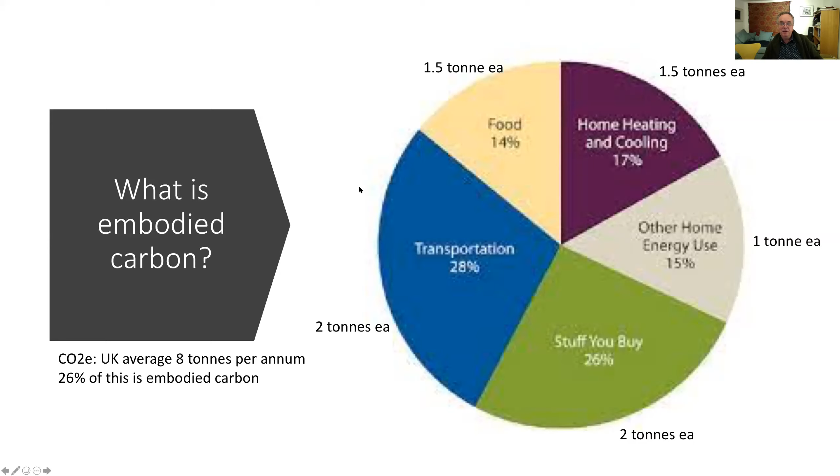It's much less than some countries such as Australia and New Zealand, where it's at sort of 15, 16 tons per person. But it's much more than most of the developing world, which is down at sort of 1 or 4 tons. So I want you to get your head around this unit of measurement, a ton of carbon dioxide. What does it look like? Well, I actually found this slide this morning, a brilliant illustration of what a ton of carbon dioxide looks like at atmospheric pressure. It's about 560 cubic meters, which more or less equates to the volume of a detached 4-bedroom house.

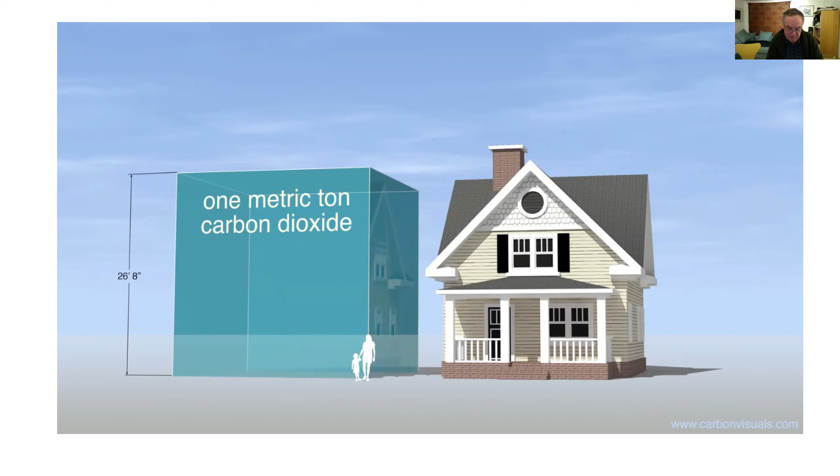What can you do with a ton of carbon dioxide? Well, you get it from burning about 5,000 kilowatt hours of gas or electricity. They're pretty similar in carbon intensity at the moment, or burning 400 litres of petrol, which would drive you 4,000 miles in a petrol car. A typical UK home burns between 2 and 5 tons of carbon dioxide per annum. The more efficient the home is, the less it burns. A family flying to Spain and back for a holiday would use about 2 tons.

A typical UK home build releases as much as 30 to 50 tons of carbon dioxide. And amazingly, even things like solar panels have quite a high embodied carbon. A 16 PV panel array would use as many as 5 tons of carbon dioxide. And it would actually take 5 to 6 years to produce that much energy once it's plugged in.

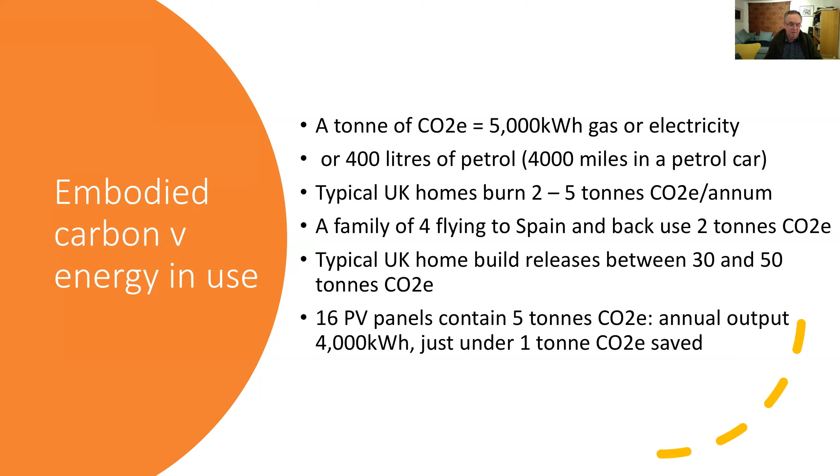Now, where do you find out more about these things? There are several databases out there now where you can dig deep into the world of embodied carbon and work out what the footprint of each product you're using is. When I started writing about building in the 90s, none of these existed. And all I had to go on was a group of photocopied sheets available from the Centre for Alternative Technology.

The ICE database, the Inventory of Carbon and Energy, because that's what ICE stands for, came out of work done by the University of Bath around 20 years ago. And it drilled down into the subject at a much more technical level than I'd seen before. It's basically just a giant spreadsheet, but it's populated with the carbon factors of any building material you could ever think of. There are many other resources which are available now, and I've listed some of them on this slide here.

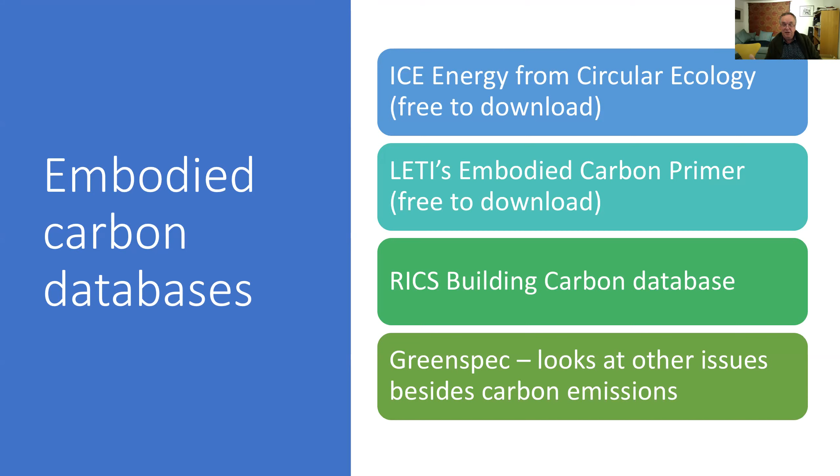They'll be available for downloading afterwards. But it's to the ICE database that I return when a query comes up. The basic rules are: first you work out the quantity of the product, the material you're using, then calculate its weight, and then look up the carbon emissions per kilogram weight and multiply the weight by the carbon factor. It's very similar to the work a quantity surveyor does, but you're getting an answer in tons of carbon dioxide rather than money to be spent.

So how do construction products stack up here? Just a cursory glance at the figures reveals there are some very basic rules of thumb here, and these are summarized on this slide. You can essentially divide construction products into a few simple categories. Generally speaking, the manufactured products use large amounts of fossil fuel energy to produce, often in kilns or in factories. And as a result, they tend to have very high levels of embodied carbon. Cement and steel are particular bogeys here, because their manufacture involves not just very high temperatures, but also splitting away the carbon dioxide from the basic materials in order to process them.

In contrast, natural materials are generally quarried and involve much less processing, and what processing there is less energy intensive. So as a result, as a rule, transportation to site is far less significant, really a second order effect. It's the amount of processing that makes the big difference here. Timber and biomass products are, of course, really interesting. They're natural products, but unlike the mineral-based ones, they absorb carbon as they grow. Exactly how embodied carbon calculators deal with this feature isn't always consistent, because it's actually quite complicated.

All trees naturally capture carbon as they grow, but once you cut a tree down, it stops that process dead in its tracks. Only if a new tree replaces the one just cut down does the carbon capturing cycle continue. In a word, the timber harvesting has to be sustainable, and that relies on a series of product certifications in place that we never quite know whether they're as sound as we'd hope them to be.

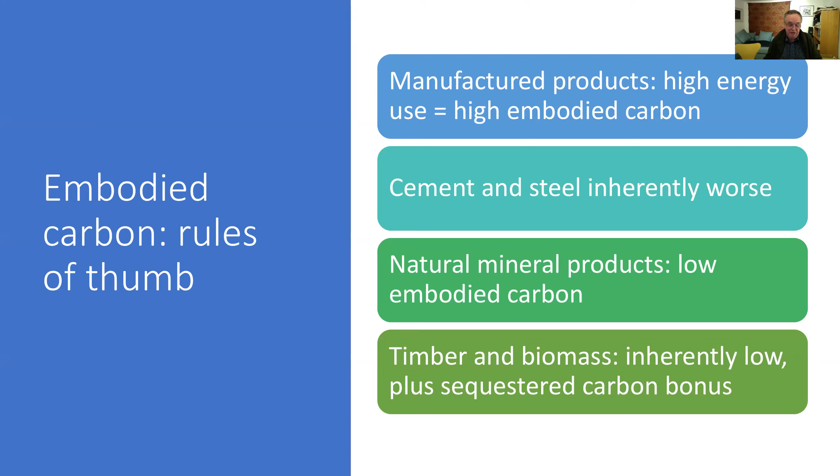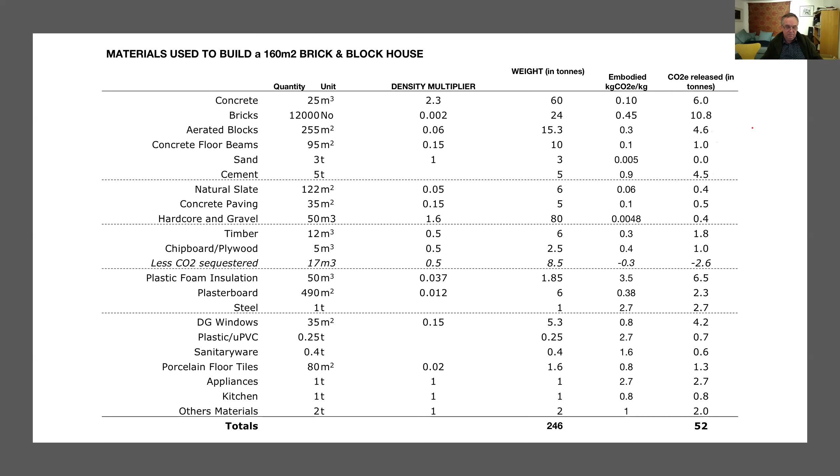But the bulk of the score is up here in the top 6 rows. Concrete, bricks, very high, 12,000 bricks, aerated blocks, and cement. In fact, that's well over half the total score. It's up here in the masonry products. That's where the bulk of the processed manufactured goods are. It just so happens that this very point about timber looking good and manufactured masonry products not looking so great has been explored extensively in the latest issue of the Passive House Plus magazine.

It looks at 6 different methods of building the same structure, in this case a 76 square metre end terrace house. It's the first time I've seen such a comparison made in print, and the results are just as anticipated. The traditional brick and block version produces 27 tonnes of carbon dioxide, which is the highest score in the study, whilst the much lighter timber frame version with modified foundations releases half as much CO2, and that's without counting the sequestered carbon dioxide held within the timber, which reduces the total embodied carbon down to a quarter of the brick and block total. The conclusion is pretty much cut and dried.

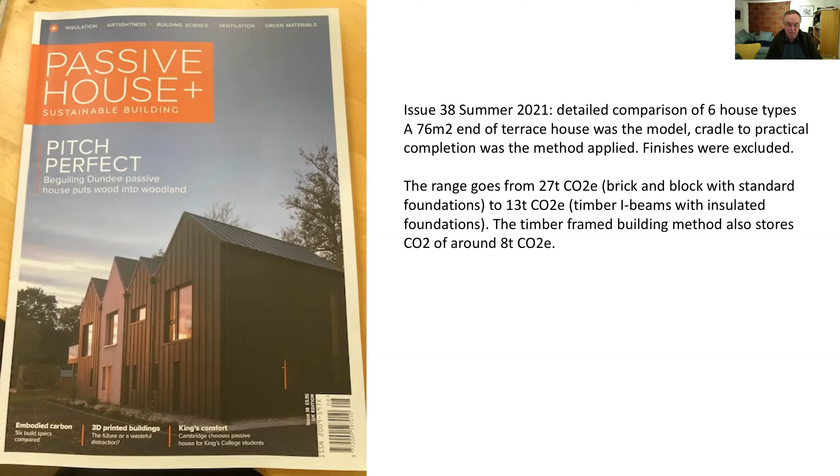We should be switching away from masonry concrete materials towards timber frame. And as if to emphasize that point, there's been a lovely article very recently by Joe Giddings in the Architects Journal, making comparison with vegetarianism and building. Plant-based options proliferate in supermarkets, he writes. The vegan sausage roll has been a sensation for Greggs, and increasingly it's happened sartorially too.

The science is broadly similar for architectural decisions. Plant-based products and materials usually have lower associated carbon emissions and sequester carbon too, meaning they can have a positive impact on our climate. He's proposing it as a rule of thumb that you don't really have to do incredibly complicated carbon calculations, but you just know that this group of products, the timber-based ones and other plant-based products, are very low in embodied carbon, and we should be moving towards building with them wherever possible.

Now, you might emphasize the point that Joe Giddings himself is a timber frame advocate. You say, well, he might just be talking his book, but on the other hand, I think he's got carbon arithmetic on his side here. So what should we do as potential builders, whether we're building new or extensions or renovating? How can we take these lessons on board and try and adjust our plans?

Well, one thing to do, if you're planning on making your house bigger, is to move away from necessarily a brick and block extension and look at loft conversions, which are heavily timber-based, or buildings like timber studios, the one I'm talking from at the moment, down the end of our garden. Prefer natural finishes over manufactured ones. Here you might be looking, for instance, at flooring, where you've got a choice between stone floors or porcelain floors or timber floor, where the less processed it's been, the less it's been cooked or baked in a kiln, the lower the embodied carbon will be.

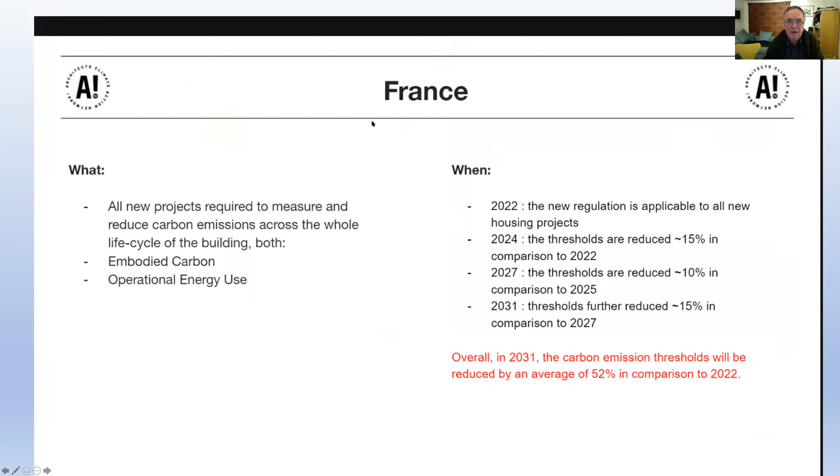Well, if you like, can I switch back to another slide? Because I've got a supplementary slide. I thought a 20-minute talk was quite enough. If you let me go to the screen share. Are we back in? Yep. Oh yes, I want to show you these anyway. These are the next ones. We'll come to those at the end, maybe those closing slides. I've gone. Oh, there it was still going.

First of all, the slide on why cement is so bad. There's two processes in making cement. Basically, it's formed from ground limestone or chalk and clay. It comes into the plant, and the limestone is calcium carbonate. They don't want the carbon of it, so you have to take out the CO2 right at the very start of the process. And 60% of the emissions are actually done before you even start baking the cement.

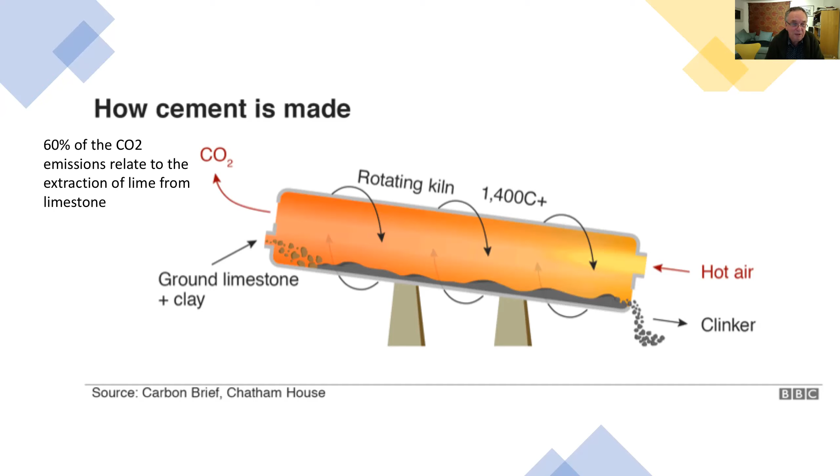Then it's rotated in a kiln at 1400 degrees C. In theory, the 1400 degrees C bit could maybe be done with hydrogen or possibly with electricity. There's a route to decarbonize that, but there's no route really to stop this calcination process at the beginning, where we're separating carbon dioxide from the calcium carbonate in order to get the product that's actually wanted, the lime.

Out at Bourn Airfield, we have a local group called DB Group, which has developed a product called Cemfree. And this is a photograph I took 6 weeks ago. I went out to visit them in preparation for this talk. They had work done at the Cambridge University Engineering Labs in 2014, 7 years ago.

They produced a cementitious-like alkali substance which isn't made from cement and doesn't involve this calcination process, and they're using it to make bricks, all sorts of things. They've made a staircase out of it. Basically, it is a replacement for cement, and critically, it's actually now available from a ready-mix company, Hanson Haverhill. You can ask for the Cemfree product.

It's about 30 to 40% more than regular ready-mix, but it's there, it's a start, and this is not the only company working on low carbon cement by any means, but it's very difficult for them. They've been ploughing away at it, getting testing and certification, and there's a lot of suspicion about it from various users. How do we know how long it's going to last? All this sort of thing.

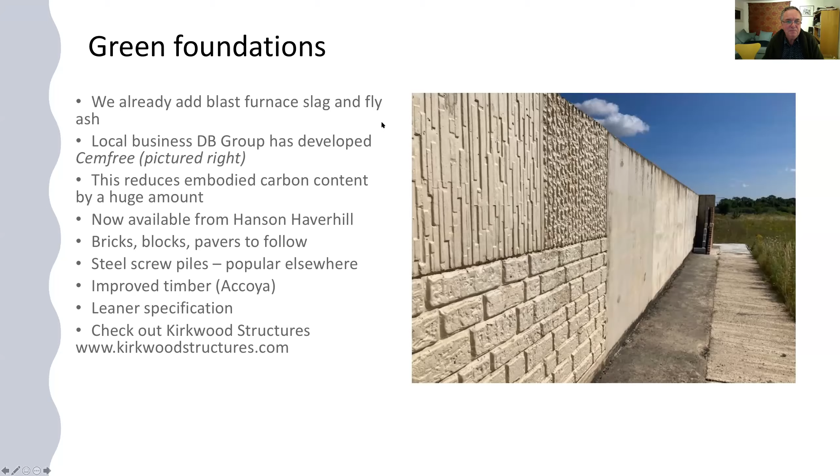Thanks very much. My question harks back to a bit of the conversation about lime cement and the bricks being reusable. What else is going on around making building construction techniques recyclable or recycling friendly at end of life? Well, this is one of the things that grows out of life cycle analysis. Oh yes, this is a proper life cycle analysis done professionally, and this is a skill that's grown up over the last 20 years with these databases.

There are far more things to take into account than the simple embodied carbon in manufacture. I can barely get my head around this, but there are points. Basically, they end up giving points, and there are points for having recyclable material. There is some smattering of people getting involved with it, but essentially, we give buildings a 60-year lifespan, which in itself is very questionable. But when they do these life cycle analyses, they tend to think it'll last 60 years and that'll be it.

One thing we can do, obviously, is build buildings that will last longer than 60 years. If you double the length of the lifespan, then you halve the overall embodied carbon emissions, and you've made recycling less of a problem. But generally speaking, builders today pay zero interest in what happens to the products at the end of their life, and in fact, the whole history of building in the 20th century has been about using more and more manufactured materials.

If you go back to Edwardian and Victorian times, it was still a very craft-based business. Using homemade lime to make the bricks, and the bricks themselves would have come from the Cam River terraces, and the joinery was all made up, and it was all very repairable and not so rigid.

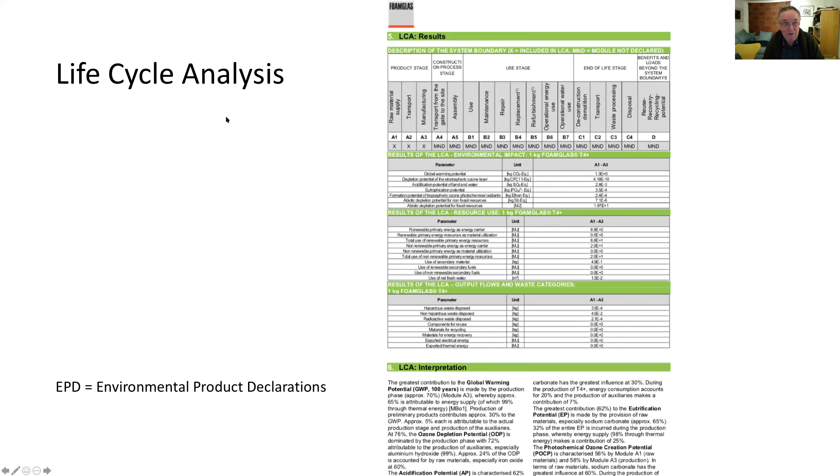We're making less recycling. I don't think it's begun to be addressed how we would actually start building buildings that could be recycled. Glazing is a good example. We're moving towards double and triple glazing, aren't we? I've actually got a slide on a very interesting case of: is triple glazing a good thing to do? Obviously you get a better energy performance out of triple glazing, but it comes with a much higher, 50% higher embodied carbon, and actually the payoff is something like 20 years, because the difference between a really good double glazing and the triple glazing

is actually quite small. This chart here is comparing the embodied carbon of 3 different materials, and actually the materials you're using are probably more important than whether you're doing double or triple glazing, but it's quite marginal. And triple glazing in our climate, which is fairly mild, in terms of overall energy use over, I mean, how long does a double glazed, triple glazed window last? We don't really know, but we're probably doing well if it's 30 years.

In the old days we were using single glazing, and it broke. There are many Georgian windows in London and other cities which are still being used from 200-300 years ago. So having high-tech windows, which we're doing, comes with a very high embodied carbon cost. Interestingly enough, I mentioned at the beginning about PV panels having quite a high embodied carbon. They're not that different to triple glazing, actually, in terms of per square meter. So to come back to your question, I think the answer is quite close to zero. It's all going the other way. It's going to more and more upmarket high-tech products that have no future once they're finished with. That's probably true of life in general, rather than just building, I think.

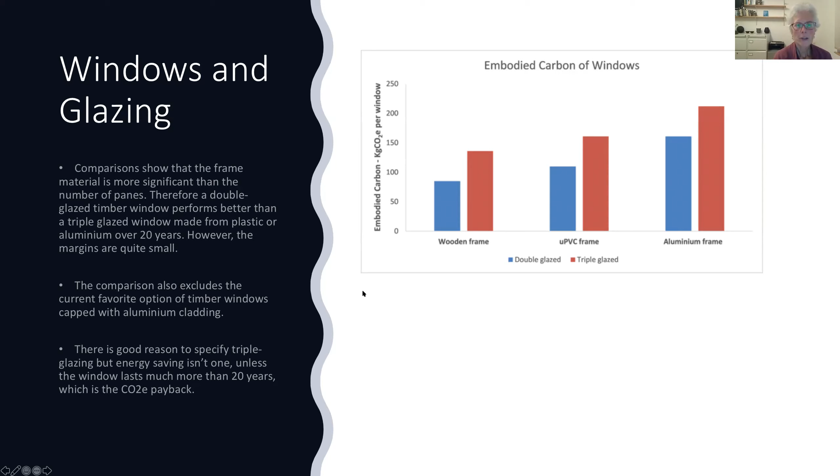And what do they have to say on how these homes should be built? Well, actually, I've just put a link in the chat to the local plan, the climate change bits of the local plan. And the climate change bits are actually really good. I suspect Emma Davies at the City Council, the Greater Cambridge Planning Service, has had a lot to do with it. But I've just written an article for the Cambridge Indie for next week about this.

But I suggest everybody goes and has a look at the link, and when you go to that page, you'll see some sub-pages, so you can look at their proposals for policy measures for zero carbon buildings, which, for example, say the energy demand has to be 15, whatever it is, kilowatt hours. Passive house level. Yeah. Really passive house, yeah. I think they're saying 15 to 20. Whereas I think passive house is 15.

I think it's a bit bizarre that they're not requiring houses of passive house or better. But actually, I think that's really promising. And there is a rather vague statement about embodied carbon, which I suspect won't mean much in practice, so I'd be quite interested in how that could be strengthened.

But I think it's quite important that all of those that care about this sort of stuff and know about it should go and have a look at these bits of the local plan and actually come out in support and stop the developers whittling it away and weakening it, because I'm sure the volume house builders will absolutely hate it. But I thought in general it was pretty good. At least the low carbon bits. There's loads I haven't looked at.